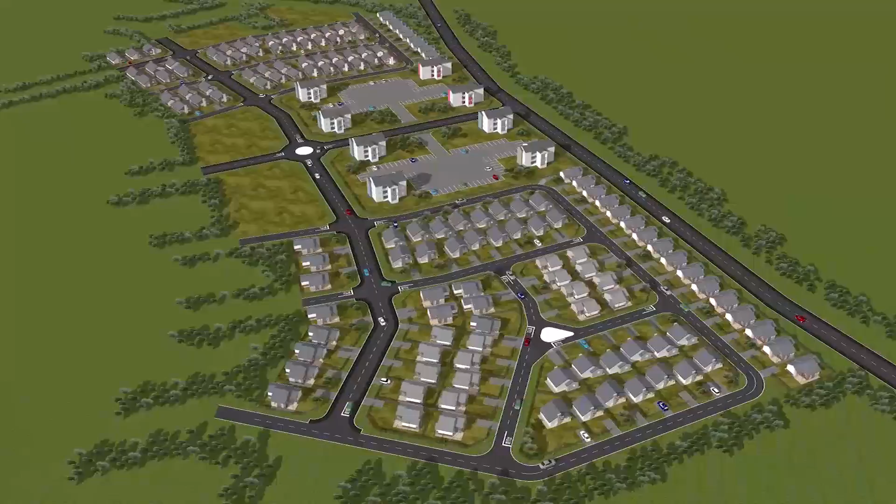Municipal engineering services conforming to a high standard will be incorporated in each development zone. These standards will be agreed on through liaison between the developers' engineering design teams and the local authorities having jurisdiction over each development area.

Potable water will be reticulated through a distribution system of medium pressure pipelines to each individual house or apartment. Where required, additional large volume storage in the form of reservoirs will be supplied to augment the existing local authority storage.

The foul sewer system will consist of a conventional waterborne piped system serving each house or apartment. The sewer pipe system ultimately leads to a central wastewater treatment facility. Where possible, the local authority treatment system will be utilized, but in areas where no such treatment capacity is available, treatment package plants will be utilized to treat sewage to a standard fit for irrigation.

Lupaso will have a total number of 201 units.

Roads will be developed to blacktop standard in varying widths, depending on the class of road. Higher order roads such as bus routes and major collectors will have wider surfaces. Stormwater will be collected in roadside drains and conveyed to larger centralized collector channels, from where it will be routed off-site for safe disposal into natural watercourses and drainage routes.

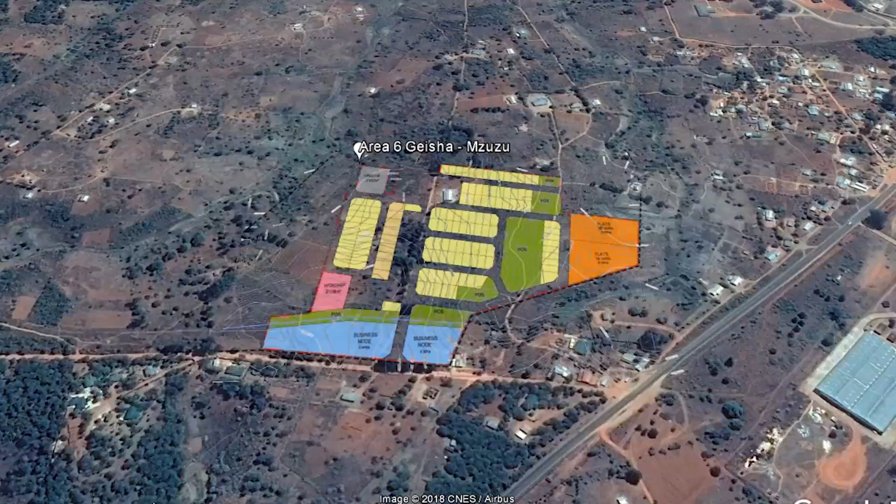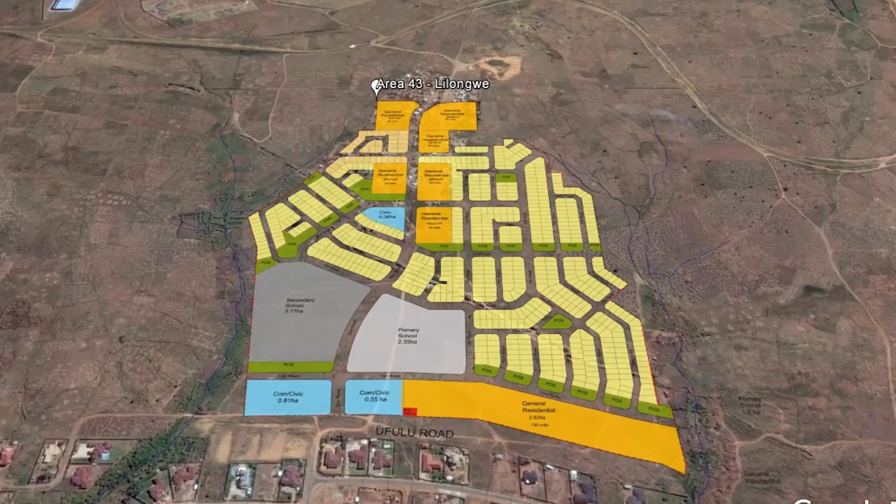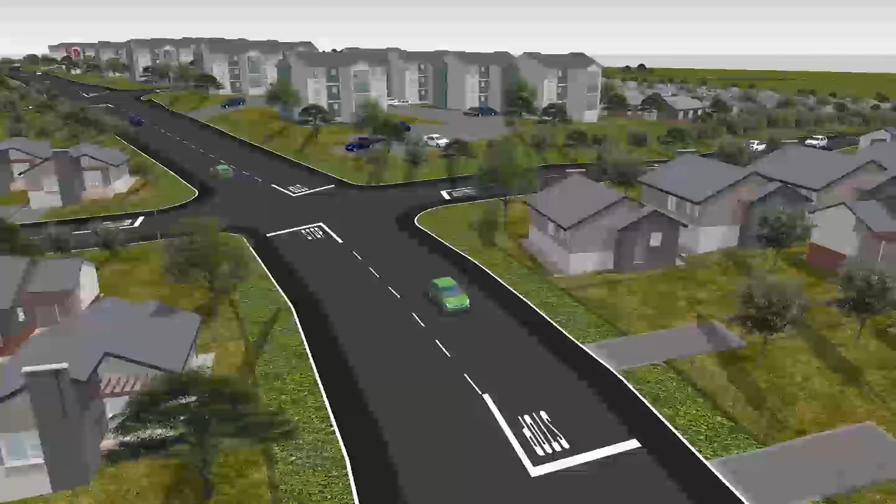The Spatial Development Framework for Lilongwe, Area 43 subdivision, includes apartment blocks of mixed units and various house types. Lilongwe is the biggest community development proposal, with a total number of 1,000 units. The community adheres to a common aesthetic without exhibiting monotonous, repetitive designs. Green pockets were prioritized in the spatial planning of Lilongwe in order to promote shared community space and encourage natural elements within the community.

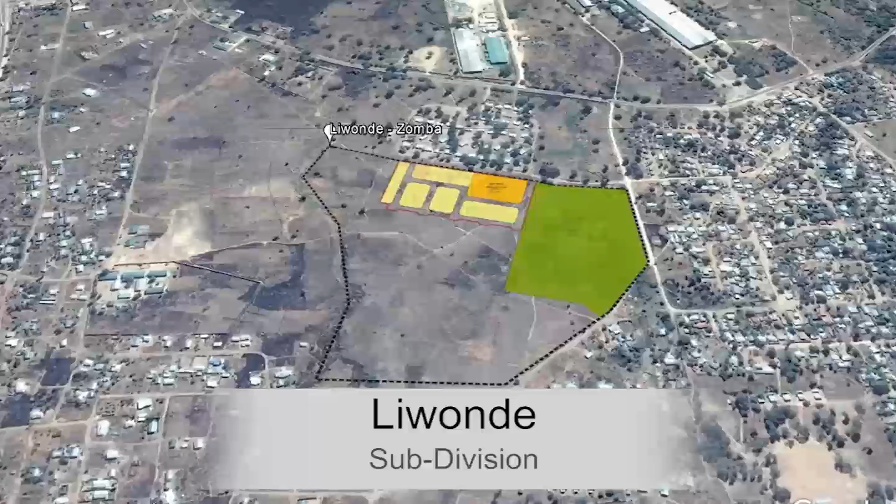The house types used in the Liwonde design proposal are different in style and design, however they all conform to a set of brief standards. All master bedrooms are a minimum of 12 square meters, all other bedrooms are a minimum of 9 square meters, and all bathrooms host showers and no baths. Again, each design boasts a color and material palette unique to the type style, however they all conform to an overall design scheme and complement the development as a whole.

Liwonde is the smallest development proposal with a total number of only 100 units.

A common design feature of the house types includes a patio area. This complements a lifestyle of external living and encourages interaction with surrounding neighbors. This establishes a sense of community, a contemporary village of sorts. There is a total of 153 units in the Old Naisi proposal.

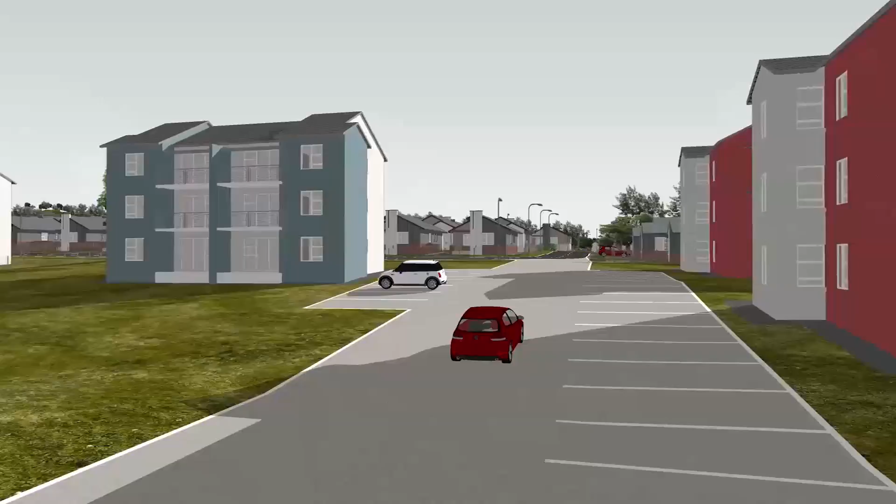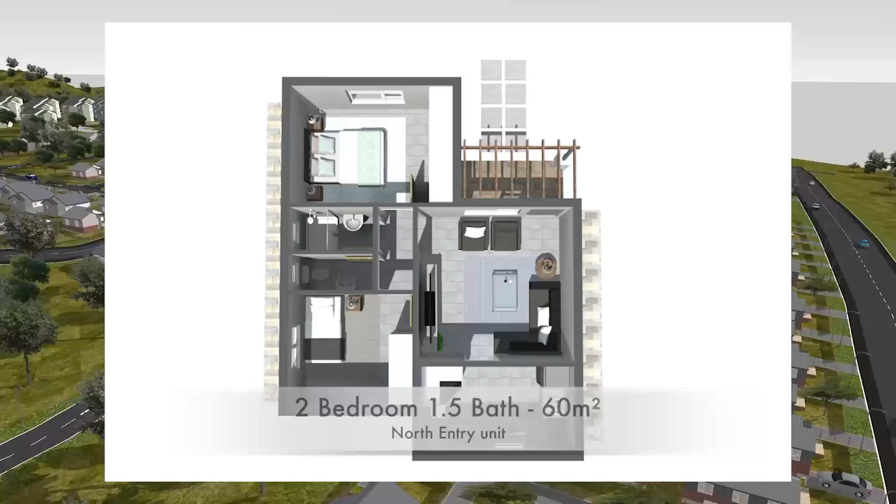All of the developments consist of north and west entry house designs of various sizes and numbers of bedrooms. These two design alternatives assist in maximizing on orientation with regards to each specific placement. The north entry house types include a 1 bedroom, 1 bathroom, 50 square meter unit, a 2-bedroom 1.5 bathroom 60 square meter unit, a 3-bedroom 1.5 bathroom 73 square meter unit, a 3-bedroom 1.5 bathroom and ensuite 85 square meter and 90 square meter unit.

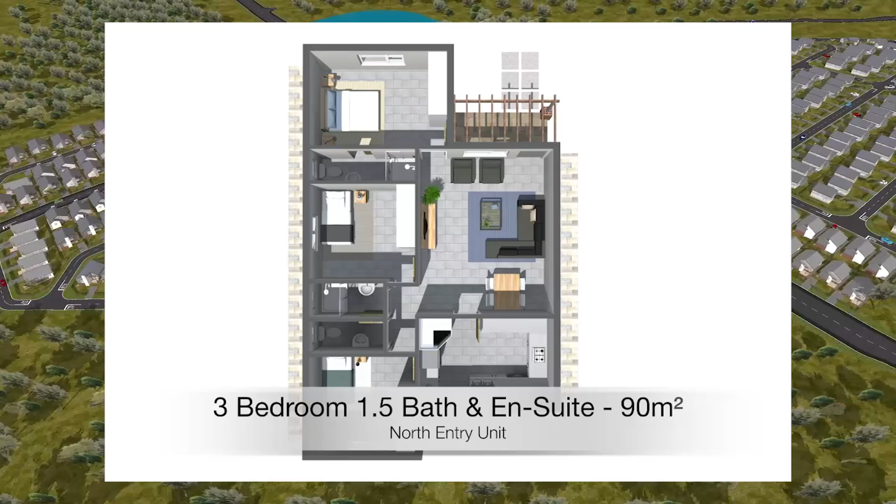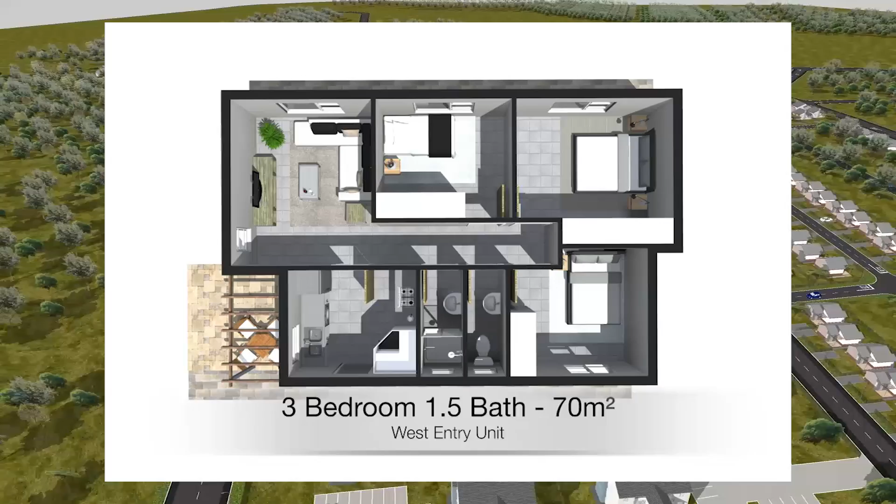The West Entry house types include a 1-bedroom 1 bathroom 50 square meter unit, a 2-bedroom 1.5 bathroom 61 square meter unit, a 3-bedroom 1.5 bathroom 70 square meter unit, a 3-bedroom 1.5 bathroom and ensuite 86 square meter, 90 square meter and 91 square meter unit.

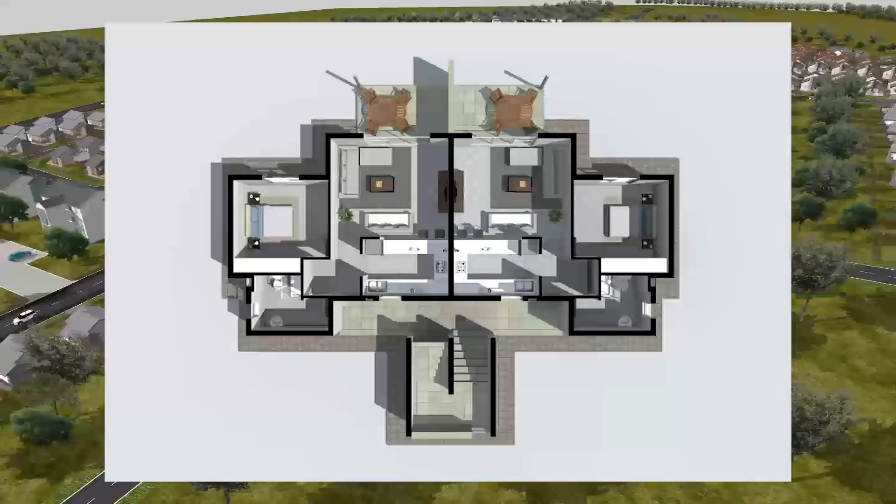All of the developments also include 3-story apartment blocks with 6 units per block. These block types include a 1-bedroom 1 bathroom 60 square meter unit, 2-bedroom 1.5 bathroom 64 square meter unit, 3 bedrooms 1.5 bathroom 74 square meter and 90 square meter units, and 3 bedrooms 1.5 bathrooms and ensuite 95 square meter units.

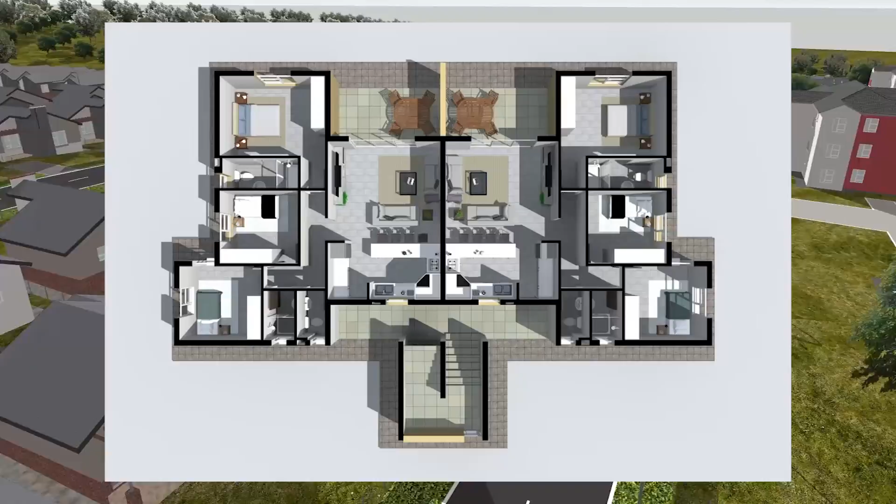In the Ngumbe development specifically, there are a total of 875 units. Again, diversity, but an overall sense of uniformity is celebrated to achieve the same overall community identity as the other proposals. In all 6 community proposals, the house types and apartment units have been designed with the Malawian climate and user accommodation in mind. The designs promote comfortable user experience and are aesthetically aligned with the local vernacular.

The site layout plans, unit designs and engineering services were finalized as a result of close working cooperation between Malawi Housing Corporation, Surge and the team: NWE Multidisciplinary Consulting Engineers, Ebesa Architects, ProQuan Quantity Surveyors, WSV Quantity Surveyors, and New Plan Africa Town Planners. The architectural content and presentation was produced and compiled by Ebesa Architects.